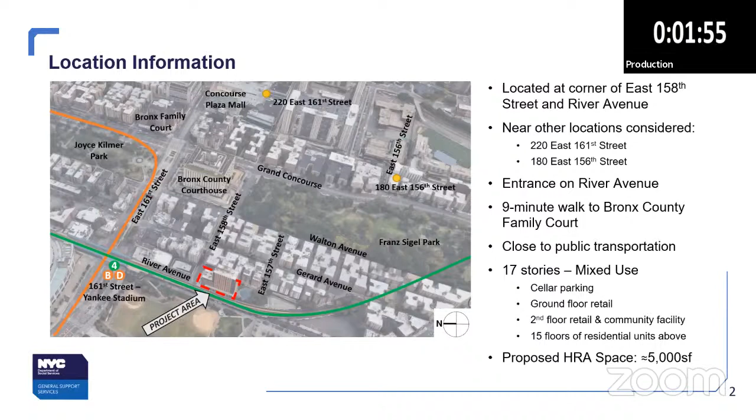The project area is located at 810 River Avenue at the corner of East 158th Street and River Avenue in the Concourse area in the Bronx, relatively close to Yankee Stadium. We considered 2 other sites in the vicinity represented by yellow dots, 220 East 161st Street and 180 East 156th Streets. However, this location was deemed the best fit for our needs as it offers optimal space configuration and is in close proximity to the Bronx Family Court. The entrance to the proposed location is on River Avenue, approximately a 9-minute walk to Bronx Family Court. This is ideal as HRA staff need to be close to attend hearings. Additionally, the proposed office is located within a 17-story mixed-use structure of which HRA proposes to occupy a portion of the 2nd floor. Next slide, please.

This location is easily accessible. It is close to 161st Street, Yankee Stadium, on subway lines B, D, and 4. Next slide, please. It's also accessible by numerous local and express buses. Next slide, please.

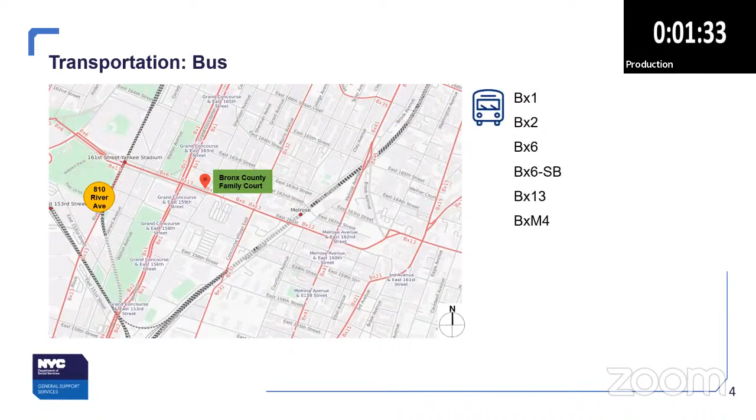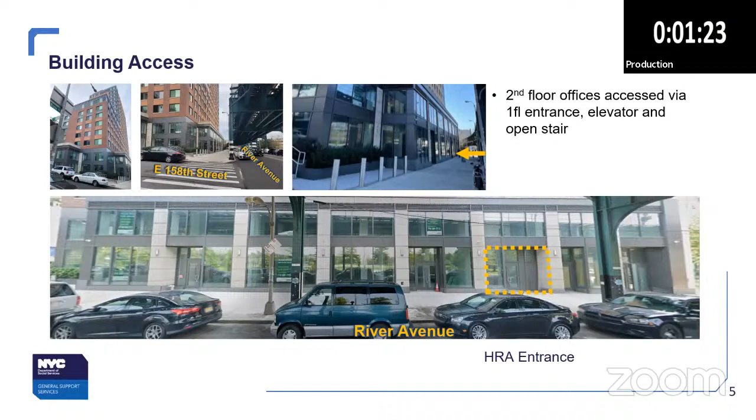The proposed second floor office is accessible from the street entrance on River Avenue, leading to a shared commercial lobby equipped with an elevator and open stair. Next slide, please.

The second floor is multi-tenanted, of which HRA proposes to occupy 5,000 square feet, accommodating a total of 20 staff to create the Bronx Borough Office. This is a joint HRA office, which will include Office of Child Support Services and Office of Legal Affairs. The HRA entrance and waiting area with the single occupancy client restrooms are depicted in purple on the bottom right-hand corner. The area in pink indicates staff and client interview areas. Lastly, the area in green represents staff-only areas consisting of print copy rooms, storage rooms, LAN room, restrooms, wellness room, and pantry.

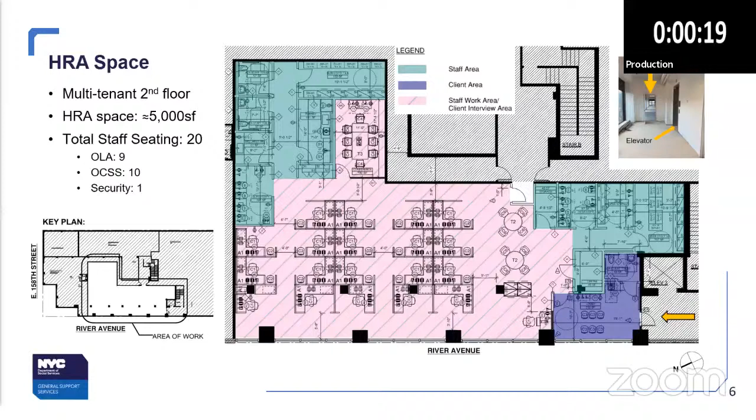In conclusion, this new office space is essential to comply with the 2018 court mandate, which will facilitate more efficient movement of high-volume cases containing documents compiled from DSS systems and paper records obtained directly from public assistance clients. Thank you so much. Next slide, please. I'm happy to answer any questions you may have.

Thank you very much. One question for me: how many client visitors do you expect to see every day in your new space here? Usually the clients are by appointment, and we anticipate 5 on a daily basis. Okay, thank you. Let me see if members of the commission have questions. Mr. Vice Chairman, Vice Chair Knuckles.

Thank you, Chair. And thank you, Ms. Sheikh. I just wanted to clarify, is this a relocation of a pre-existing office function, or is this a new office function, pursuant to the 2018 policy that you just mentioned?

In 2018, when we were mandated to have a joint function, we consolidated and comprised all of our functions at 900 Sheridan Avenue, which is where the court space is located. We were in the lower main level, basically the basement area, and we were very constricted and confined. We determined that we had very poor internet connection, and then COVID happened. A lot of our hearings had to occur virtually, and we determined we weren't able to conduct these meetings virtually because of the poor connection. Right now, our staff are working from home. We did create an intermediary office at 305 Ryder; however, that is 20 minutes away on a bus line. So although we accommodated ourselves at 900 Sheridan, it wasn't ideal, and so now we're looking for a more permanent location.

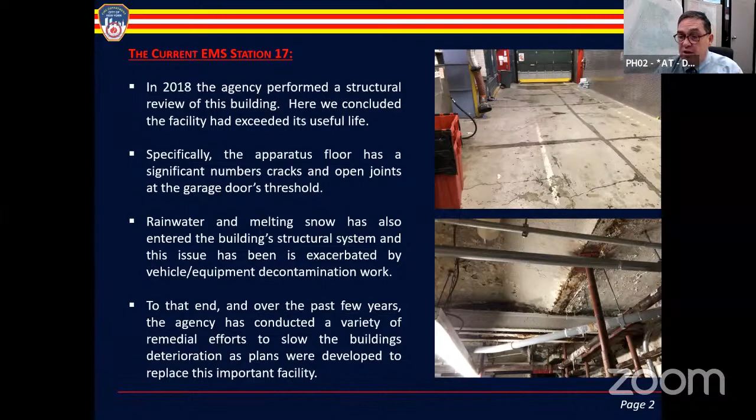With funding support from City Hall to replace this facility in 2019, the agency selected the vacant parcel at 1257 Morris Avenue for the new site. Located within Bronx Community Board 4, which is under the agency's jurisdiction, the lot measures approximately 15,000 square feet and is adjacent to the quarters of Engine 92, Ladder 44. Here, the agency, working with DDC, plans to build a 2-story, approximately 11,700 square foot facility with below-grade parking for station staff to serve as a new home for Station 17. Next slide, please.

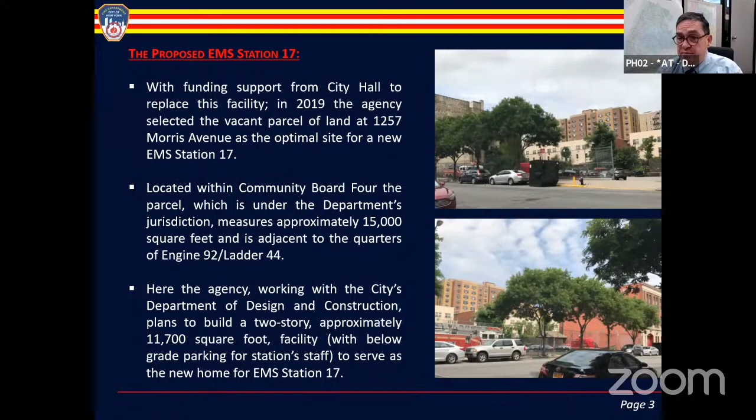The proposed facility's second floor has an office for the station's captain, male and female locker rooms, bathrooms, a stress reduction room which is a gym, training area, outdoor terrace, a lactation room for EMS members who are also nursing mothers, space for security and telecommunications equipment, several storage areas, the building's mechanical systems, elevator controls, and custodial closets.

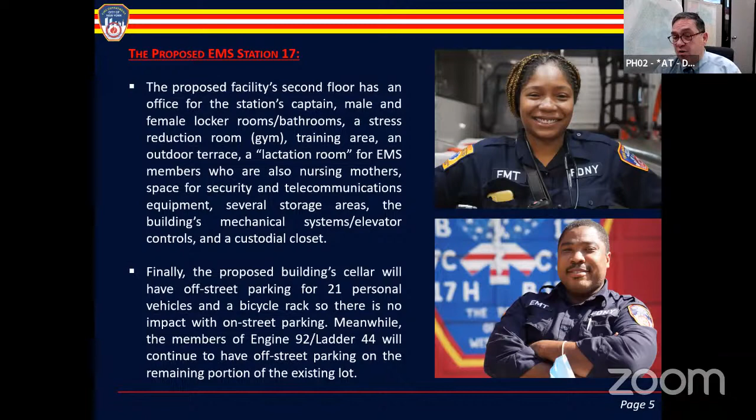Finally, the proposed building cellar will have off-street parking for 21 personal vehicles and a bicycle rack, so there is no impact on-street parking. Meanwhile, the members of 92 and 44 will still have off-street parking on the remaining portion of the lot.

EMS station is not allowed as of right in R7-1 zoning district, so a request for a special permit is being made for the proposed project.

The proposed EMS station will comply with all applicable bulk, height, and setback restrictions, as well as parking requirements in an R7-1 district. To summarize, the fire department believes this proposed new facility is important because it will enhance the agency's EMS capabilities within Bronx Community Board 4, eliminate traffic and parking issues along Ogden Avenue, provide our EMS staff with a state-of-the-art facility while moving them out of an old structurally failing building, and not impact traffic and parking along Morris Avenue after it is built.

As such, the fire department respectfully requests the Planning Commission support this action so we may improve the agency's emergency medical response capabilities in this area.

And with that, I will take anyone's question.

Thank you very much, Mr. Harney. We appreciate it. And forgive me for going long. That's okay. You didn't. You were almost perfect.

One question, forgive me if you said this, but the current location that is being used - what's the future of that site?

Well, right now, the fire department must use this facility for the next several years until the proposed project, if approved, is built. Once the proposed new facility is built, the fire department will relocate to the new site on Morris Avenue, and then surrender jurisdiction of the property to the Department of Citywide Administrative Services. Plans are, as of today, to transfer jurisdiction of this building as part of the borough-based jail system project for a community center.

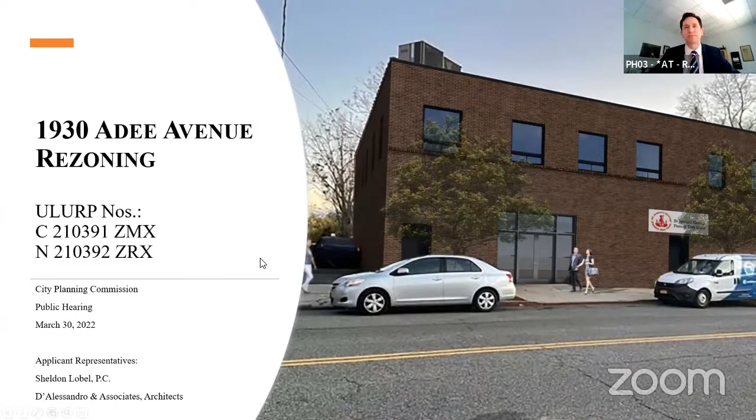Thank you, Chair. Commissioners, good morning. Richard Lobel of Sheldon Lobel PC, pleased to present the 1930 Adee Avenue rezoning. The building at the site received a certificate of occupancy back in 1963 as a metal manufacturing institution, and at the time it occupied the western portion of the site. In 1987, materials were filed with the Department of Buildings to expand that building, but between 1987 and 1995 the building was expanded without the benefit of approved permits, and in 1995 a violation was issued by DOB. So the building right now is too large for the site, built outside the parameters of the existing R4 zoning. In 2017, the applicants obtained the site with the intention to convert it to daycare.

So what would be done here is a rezoning from R4 to R6B. This would be for the existing site as well as for the 3 adjacent residential sites, which we will discuss momentarily. In addition, MIH options 1 and 2 would be mapped.

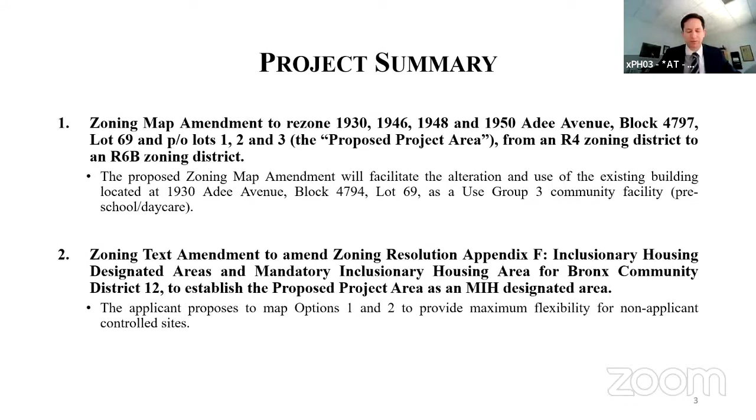So what would be resulting from this: your existing building is built to a 2 FAR. The site is roughly 7,000 square feet, and the building would be roughly 14,000 square feet. Again, an existing building, but this would allow for the renovation and legalization of it. Interestingly, the 2 FAR of this building is permitted within the existing R4, but the lot's front yards and side yards are non-compliant, as well as a small portion of the rear for lot coverage. So there's a portion of the ceiling in the rear that would be reduced by 2 feet in height, and that would cause, with the rezoning, the entirety of the building to be complying.

This is all in favor of the opportunity for St. Gemuel, a beloved local daycare institution, to be able to locate at the site. They've served members of the community for close to 20 years and recently, as of last week, received New York City DOE approval to operate at this site. So this would allow them to operate here with the modifications as proposed.

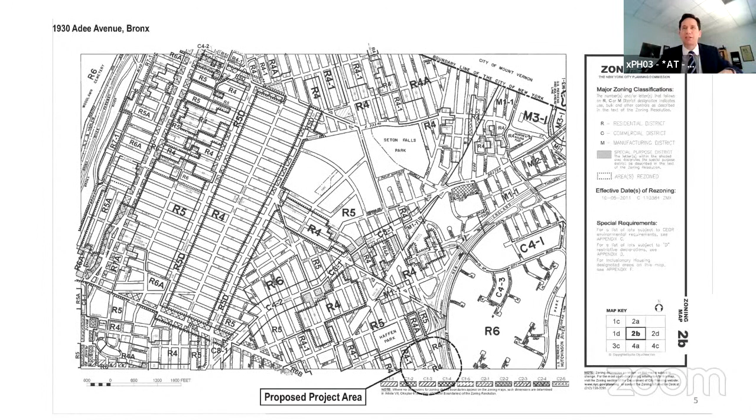So the zoning map shows a vast R6 to the east; this district itself is R4. Why is this rezoning merited here? You've got Adee Avenue, a wide street at 80 feet wide, off the New England Thruway. So even in and of itself, an R6B would be appropriate here, a slight uptick in density, respecting the fact that we are next to a major thoroughfare along an 80-foot wide street. The site itself has great street access, being a corner lot.

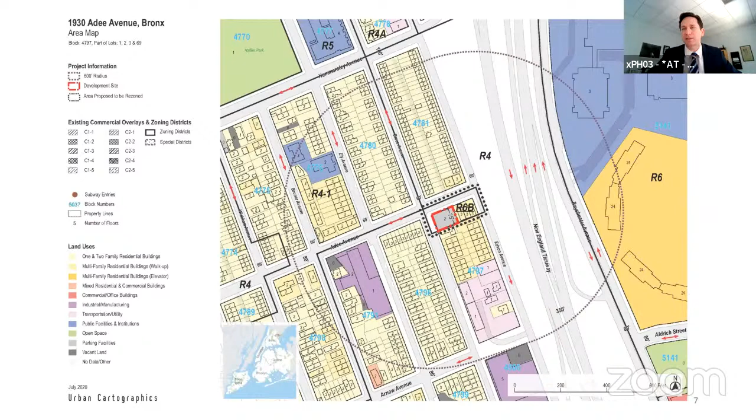In addition, the 3 residential buildings to the east of us are all non-complying, with FARs greater than 1 up to 1.63, so this would make them less non-complying. If you go to slide 12, there's a plan showing the 2-story portion which would be reduced by 2 feet in order to cause this to be legal and complying under the R6B. With that, the applicant team is happy to answer any questions.

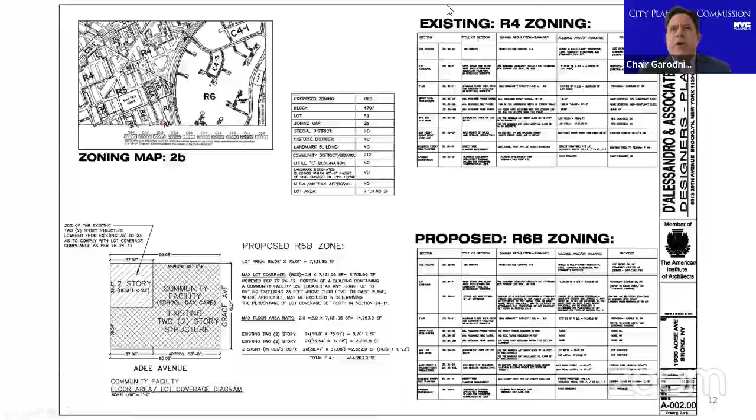The building of interest that you hope to allow St. Gemuel daycare to come in, what is currently happening in that building? I know it's overbuilt, non-compliant, all of those things, but what is actually happening in that building today? So it's currently vacant. There was a house of worship operating at the site prior to vacancy.

One of the reasons I think it's a meritorious rezoning is because the underlying 2 FAR for community facility is the same in the existing R4 and the R6B. This basically was an opportunity for us to allow for these more generous yard requirements to legalize this building with a minimal amount of work. I would add, Chair, that the conditional approval from the Department of Education provides funding for St. Gemuel for the 2022 to 2023 school year. So the community board, the Bronx Borough president, everyone was very excited about the opportunity to provide this quality daycare instruction at this site.

On the R6B, you're including this site, I know, mostly for compliance and yard requirement purposes, but you're also including 3 additional sites, which, as you described, by changing the zoning, would make them less non-compliant. Can you say a little more about that, and also about R6B in this context?

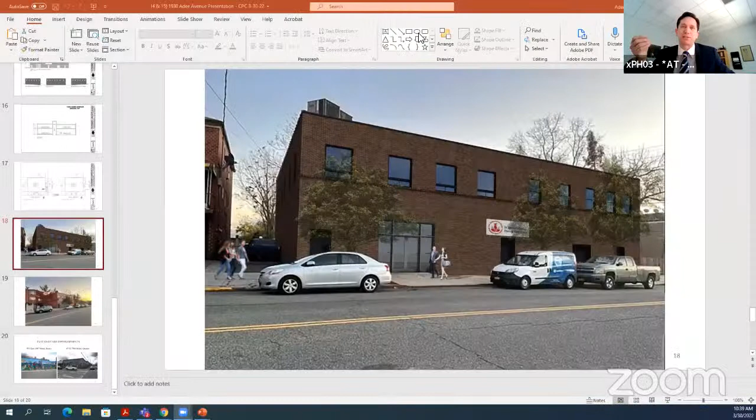Sure. So Ron and Michael, the applicants, actually have experience in producing and building daycare centers. I don't know whether we're able to recall the slides. The last slide included demonstrates two of their prior projects, which are both daycare centers. Commissioner Burney, we did want to, to the extent those can be put up. If not, I can describe them. Oh, there we go, still the last slide in the presentation.

So one in the Bronx and the other in Queens, and essentially the buildings are painted with murals to make them more inviting to the pre-K through nursery school children who attend the site. So they are conscious of the appearance of the building and would make this as inviting as possible. So thank you for the comment.

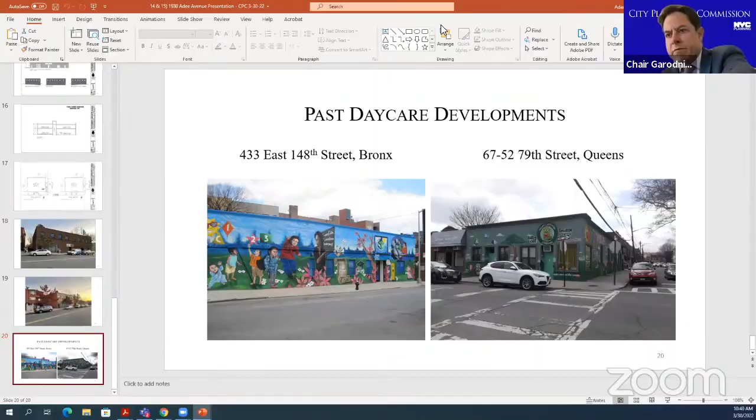Thank you, Commissioner Burney. Giving the rest of the commission a moment to pose any questions they may have here.

Okay, seeing none, and I will note we also do not have members of the public wishing to testify on this item. So thank you for being here with us, and I will close the hearing on this item and move to the next one. Madam Secretary, if you don't mind, please call the next item.

Borough of Brooklyn, calendar number 16, Roundtable Senior Center, CD4, C220212PQK. Public hearing in the matter of an application for acquisition concerning Roundtable Senior Center.

Great, thank you very much. We have joining us today Leah Krieger from DCAS, John Koza, who is also with DCAS, and I'm going to let Ms. Krieger define his specific role. And also we have Sandra Christian. So I'm going to turn to Leah Krieger from DCAS for 3 minutes.

Welcome. Thank you, Chair and Vice Chair, and thank you, Commissioners. I'm an architect with DCAS, and John Kosa is the lease negotiator with DCAS, and Sandy Christian is with the sponsor organization Riseboro. Roundtable Senior Center is located in the Bushwick Avenue section of Bushwick. Please go to the next slide.

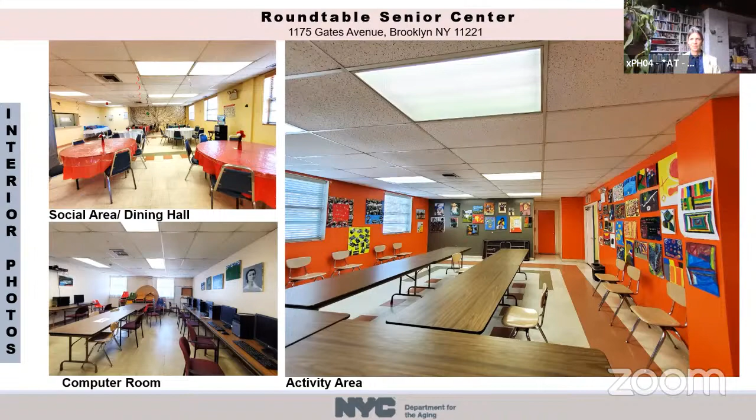Next slide, please. Hi.

Did we lose the slides? We can pause to get those up. We'll give you a little extra time here.

Don't worry, appreciate that. So one of the concerns of the commission has been the street beautification, and so the intention is to provide planters. The entrance to the senior center is on the left, the entrance to the child care center is on the right. So the intention is to take down the roll gate, to paint the doors so that the two front doors match, to provide planters, and to repair the sidewalk and remove graffiti.

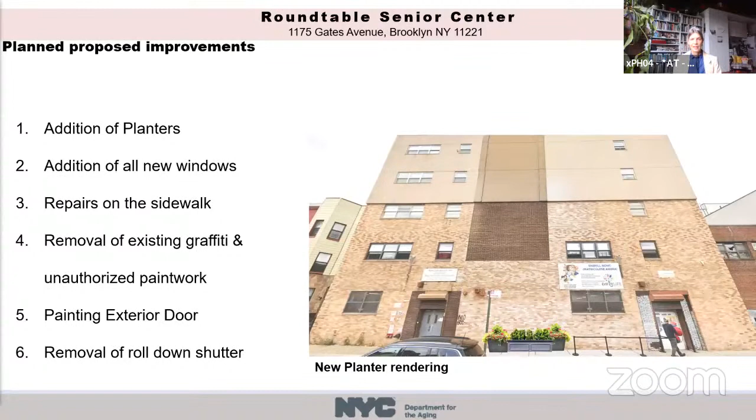Next slide, please. And that's our presentation today. We are open for questions.

Great, thank you. Just going back, the Roundtable Senior Center has been on this site for how long? The center has been open for over 40 years. Riseboro took over 16 years ago as the sponsor. Okay, and the current lease expires when? The current lease expired in January of this year, but we're occupying it under the TNH clause until we sign a new lease. Okay, got it.

Thank you. Let me go to Vice Chair Knuckles. Thank you. Mr. Costa, you are with DCAS, are you not? That's correct, yes. Have you visited this location recently? No, I did visit it. It probably was 2 years ago, approximately, by now.

Well, has anyone from DCAS visited the property recently? What I'd like to get is a personal expression of the current physical condition of the location. Can anybody speak to that?

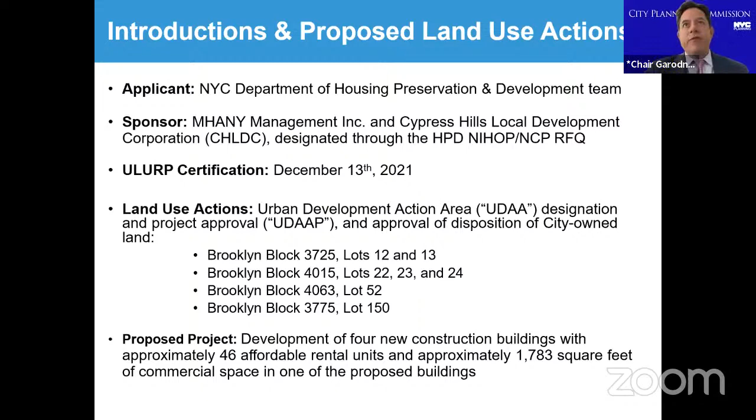The project is being developed as a joint venture between the Mutual Housing Association of New York, or MHANY, and the Cypress Hills Local Development Corporation, CHLDC, under HPD's Neighborhood Construction Program, or NCP. The ULURP application was certified on December 13th, 2021, and is seeking approvals for Urban Development Action Area designation and project approval, and for the disposition of city-owned land. Now I'll hand it over to the development team.

Hi, my name is Meredith McNair. I'm the community planner at Cypress Hills LDC, and we are very proud to be partnering with MHANY Management on this project. CHLDC itself is a 38-year-old nonprofit that has been serving Cypress Hills and East New York for these past decades, both as a community development organization and a settlement house with a wide range of services serving all ages in the neighborhood. MHANY is similarly rooted in this neighborhood for almost 4 decades, and has a long track record of affordable development, and also is a home buyer and foreclosure prevention counselor.

This map shows the 4 development sites: 492 Glenmore, 2358 Pitkin, 943 Dumont, and 743 Blake. You can see they're all within a few blocks from each other and pretty close to the Van Siclen Avenue C station. These are actually split between the 2 council districts, 37 and 42, with 2 sites in each district.

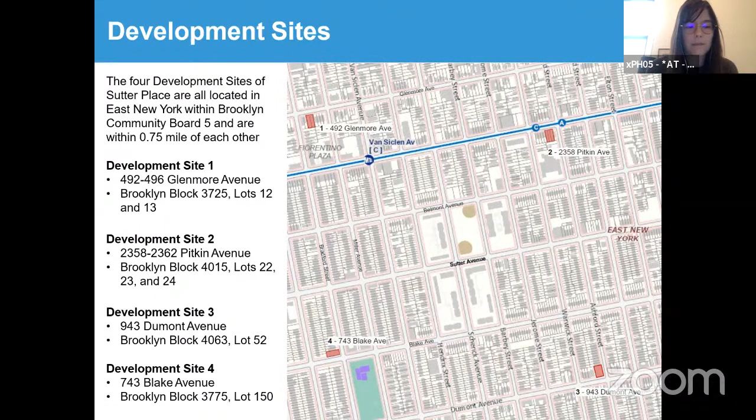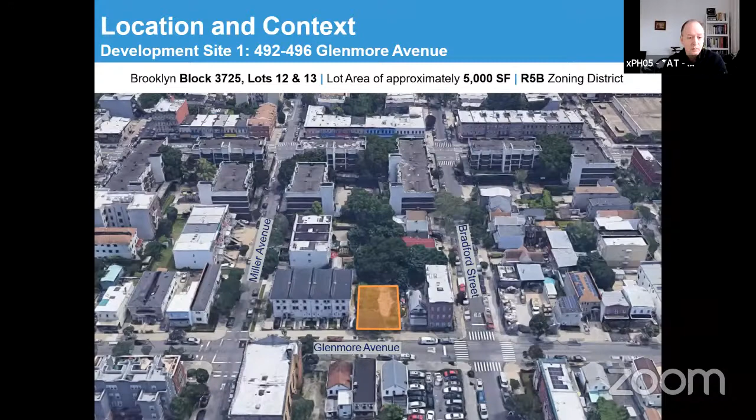Hello, my name is Chin Dow Glasgow, representing RKTB Architects and Project Architecture. I'll be doing the buildings. This is site 1, which is 492, 496 Glenmore, a 5,000 square foot lot, mid-block with a low density zoning of R5B.

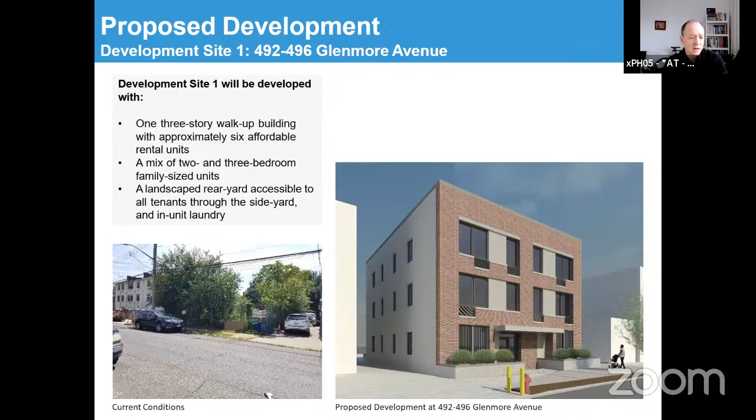To be concise here, all sites have back lots or backyards that are accessible by all the tenants of the building with landscaped areas, hard areas, and raised planters. This building has 6 units, 2 and 3 bedrooms, and it's a walk-up building.

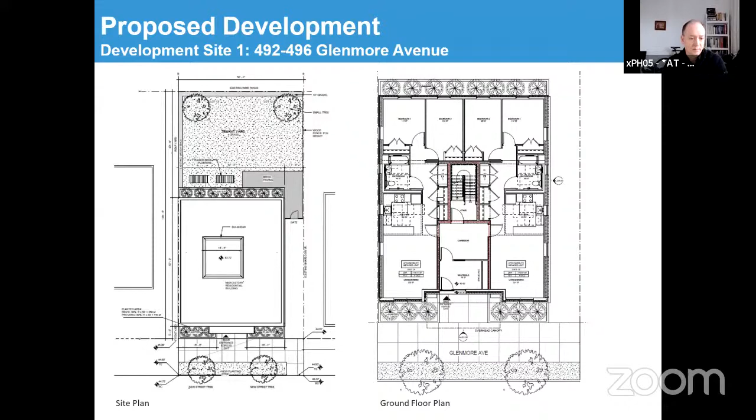Here you can see the site plan showing the rear area with planters, paving, trees, and raised beds. You can see the typical layout of the units. The front is set back, affording some privacy and planters, and then you have large living rooms, kitchens, and bedrooms, and all of the units, except for the large building, have in-unit laundry.

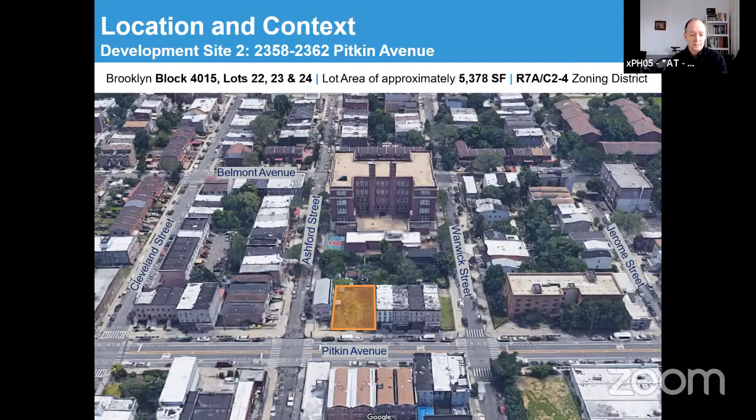This is along the busy Pitkin corridor. It has ground floor retail space, which will likely be divided into 2 retail spaces. It has the residential entry on the left. It is an 8-story building with all 1 and 2 bedroom apartments. This one has a shared laundry on the roof with an outdoor deck on the setback of the building that is open to the tenants, serving as an amenity to the laundry room. It's an elevator building with 26 units.

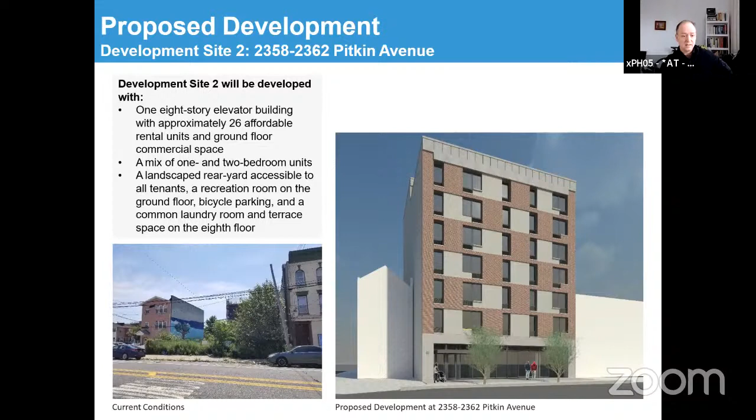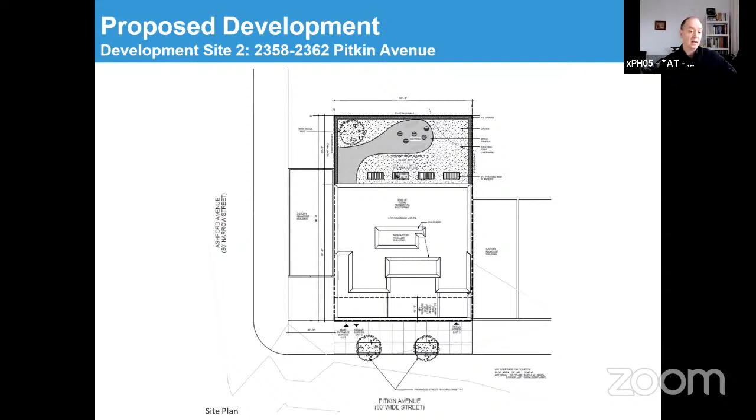Here you can see the site plan with the shared space in the rear, the front, and the setbacks happening at the upper floor. The ground floor also has a common recreation room, which acts as both access to the rear yard and common space.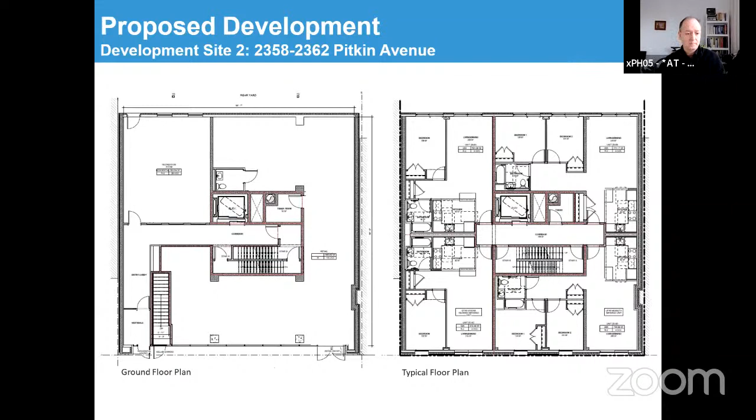This is the next site, a 5,400 square foot lot in a very low density R5 zoning district. This is the one we're asking for an override, and I'll address that quickly. We're essentially asking—there are 2 setbacks required on a lot like this, as we are not providing parking, since it is an income restricted housing unit building. The setbacks are generally defined somewhat for parking.

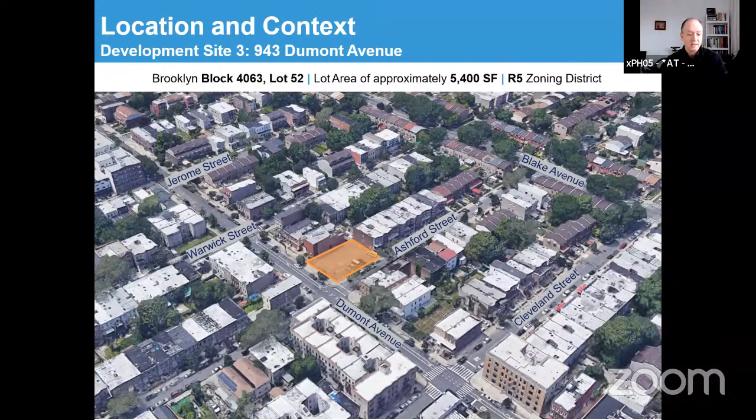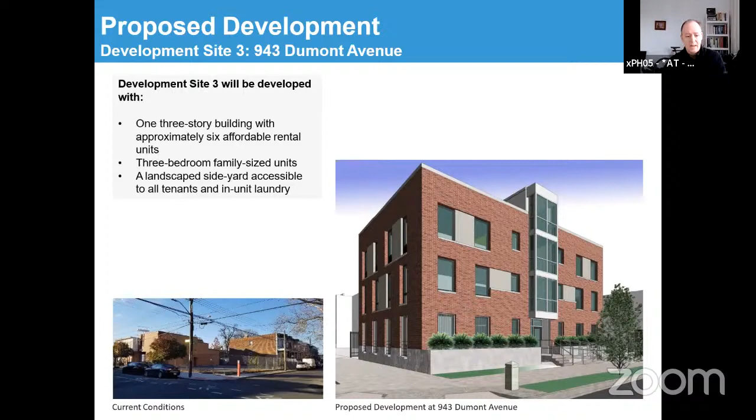So here you can see the building. There is one setback along the more residential street, but we are not setting back on the more commercial street. And you can see in the slide to the left of the street view that most of the buildings here do actually push up to their property line, and this would not be inappropriate for the existing context of the building. The building itself has 3 stories. We maximized 3-bedroom units, 6 total with a center walk-up stair, and we maximized what we could fit on the site with unit sizes.

Next slide, please. Here you can see the site plan. So on the site plan, you can see to the left here, the facade is set back. We raised up the building 2 feet with a ramp and stairs so that we can get some privacy to the ground floor unit that's at the corner.

And then, one of the reasons we need this setback, or rather we need the building not set back, is because the lot is 90 feet deep. We do need a 30-foot legal light and air at this side yard in order to provide legal light and air for the bedrooms of this unit, which you can see at the top of the typical floor plan, where the living room is in the corner and the bedrooms are on the side. And then in the middle here, you can see the walk-up stair with open glass to the street to act as a semi-private but safe space.

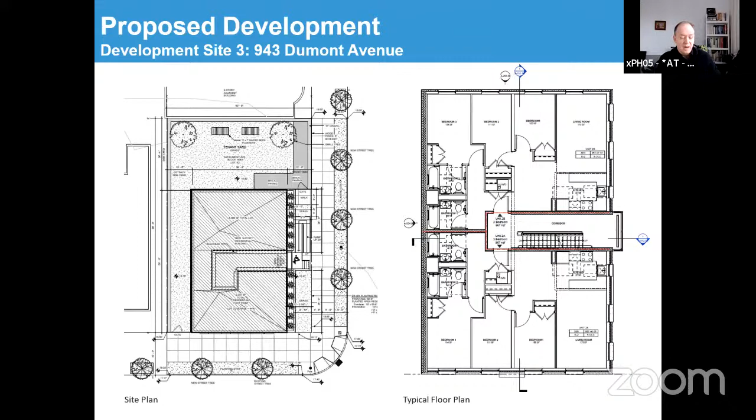Next slide, please. Here you can see the last site, which is 4,000 square feet. It has a slightly higher zoning at R6. Another corner lot. Next slide, please.

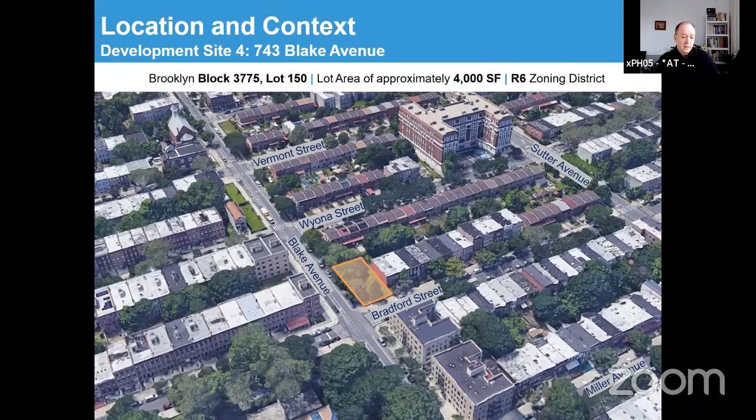And here you can see the building itself. It has a setback along the right-hand side there, and it has a similar open stair in the center with a circulation. There are four 3-bedroom units on each side, going to a total of 8, and again with a landscape yard.

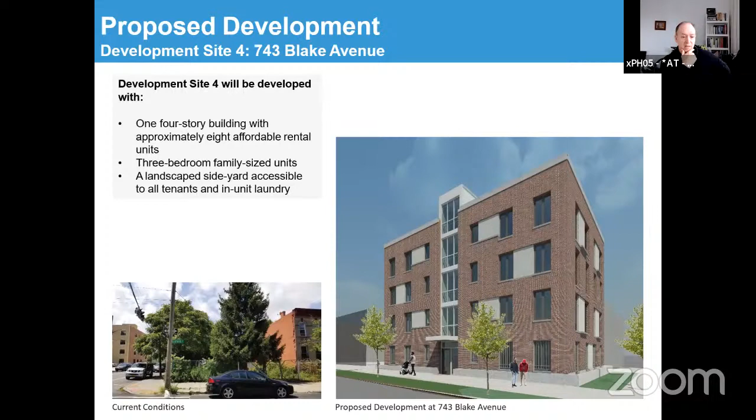Next slide, please. Here you can see the site plan. We don't have any problems with setbacks on this site because it is a 100-foot typical New York City lot. So we're able to obtain the 10-foot setback on the bottom, which aligns it with the existing building on the right, and still get a 30-foot legal light and air yard for the units.

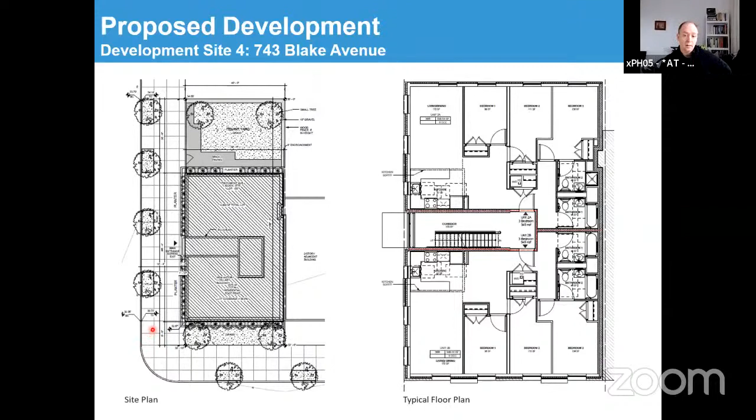And with that, I turn it over to the team.

Good morning. I have 10 seconds to tell you that the project is a 100% affordable 46-unit development, and what you see here is actually a realignment of the unit incomes in response to the council people, both Councilwoman Nurse and Councilman Barron, the community board, and the borough president. So we actually worked with HPD to bring the affordability down. You'll see here that of the 46 units, we still have some, as there are people in East New York, at the 60 to 80% AMI. But we actually pushed down, and over 70% of the apartments are available at AMI levels affordable to residents currently in East New York.

Next slide, the rents reflect 30% of income by those percentages. The next slide summarizes our ask. Next slide, please. And I don't know, Nick, if you want to quickly give a couple of words.

Sure. Okay, well, we can answer questions about the schedule if anyone has it. Thank you so much. Yes, thank you very much. Time is up, but we'll see if there are questions on the schedule. Good to see you.

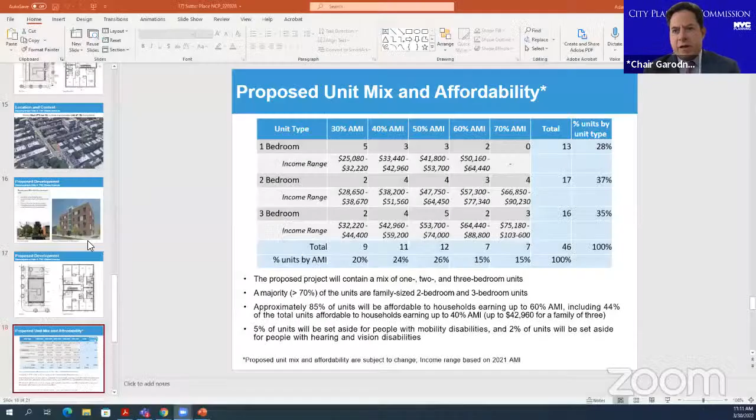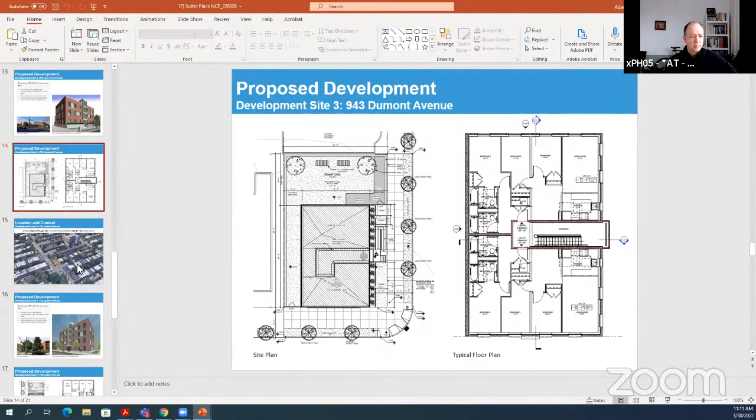Like if you could go back to the aerial view or the site plan, I could show you that. Let's see if we can pull that up. We'll ask our team to bring the presentation back up. It would be page 14. Page 14? Okay, correct, yes. Great, thank you. Okay, here we are. If you look at - actually go one more please, before that. One more past that, the aerial view is the one where you can see.

Okay, here you can see along Dumont, as Ismenia was explaining, the buildings are not set back there on Dumont Avenue, right? So that's really more conforming with what's happening with the rest of the buildings, because Dumont is more of the avenue, and Ashford is more of the residential street. You have retail along Dumont and that kind of thing, so it really is not out of character with the context.

Right. Okay, so I think the whole point here is that we wanted - I don't like it, again, you guys are all the planners - but we wanted to maintain the street face. So on Ashford it will be aligned with the other buildings currently on Ashford, and on Dumont it will be aligned with the current buildings on Dumont. Okay, I got it. By doing it this way, you keep a consistent street front on both Ashford and Dumont, and you comply with legal light and air requirements at the same time. I got it. Okay, all right, thank you. That's helpful, thank you.

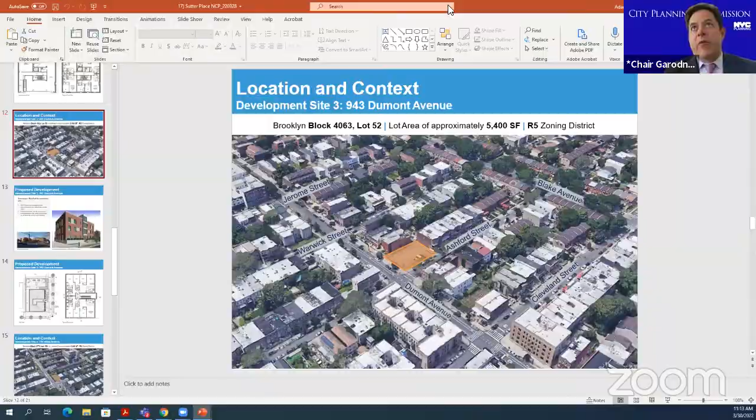Let me see what other questions there are here, if any. And while I ask this of the commission, I'll just confirm with the applicant team that Ryan Moros is part of the applicant team. We have him signed up here just in a slightly different way. Okay, all right, yes, great. He's from HPD. Okay, that's what I figured, but I just wanted to confirm.

Yes, thank you all. It's great to see you chipping away at these smaller sites, which I realize are a particular challenge to develop, and I especially appreciate the daylit stairways on sites 3 and 4. That's always a nice thing to see. I wonder if you could tell us a little about how these are going to be managed. I know you've got lots of other properties in the neighborhood, but when you have units scattered all over the place, management is sometimes a challenge. Can you tell us a little about your management approach?

Sure, thank you Commissioner Levin. It's Ismini. MHANY Management will be co-owner with Cypress Hills, and we self-manage. I think we cut the slides showing where our buildings are - we own over 700 units of housing in and around these sites. That's actually why we applied for this project in the first place, because we could just add them to our portfolio. MHANY's portfolio happens to be a scattered site - we have about 200 small buildings, all less than 10 units, many of which are in East New York and in CB5. So what we have is a system, and none of the units will actually have a resident superintendent.

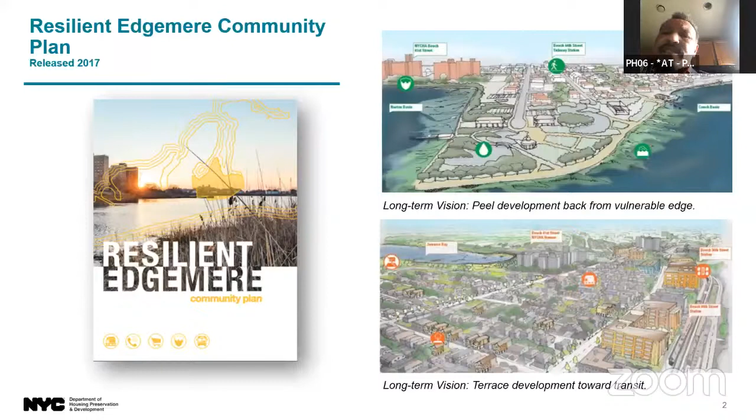So as part of the long-term vision here, peeling back from the vulnerable edge, particularly at the bay side, and then terracing development towards transit at the other end of the neighborhood. Can you go to the next slide?

The Resilient Edgemere Initiative culminated into a plan in 2017 that identifies a land use framework and sets strategies to create resilient and affordable housing for a range of household incomes and sizes, increase retail and community facility offerings, mitigate future flood risks, increase waterfront open space, and improve the coastal ecology. The plan positions Edgemere into the larger vision of the city to improve the ability of flood-prone neighborhoods to withstand and recover quickly from future storms.

These are the goals and strategies from the plan: protect the neighborhood from flooding, create resilient housing and maintain low density feel, improve streets and transportation, and increase neighborhood amenities. Next slide, please.

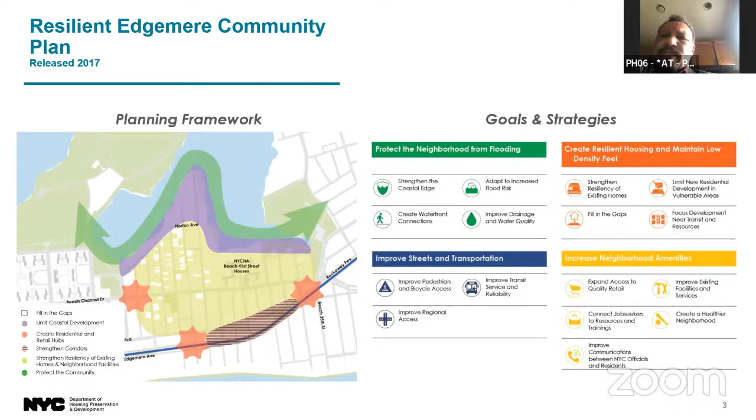In the wake of the devastating effects of Superstorm Sandy, the city has invested into this community and the peninsula as a whole to make it more protected from flood events, as well as more accessible to natural amenities for the folks that live there and visit there.

These investments have and will include park improvements at Bayswater Park and Rockaway Community Park, as well as continued sewer and road condition improvements between Beach 49th Street and Beach 59th Street, HPD rehabilitation, reconstruction, and elevation of approximately 109 storm damaged homes from Superstorm Sandy, and the work of the U.S. Army Corps of Engineers with the support of the Mayor's Office of Climate and Environmental Justice and the Parks Department to protect the peninsula from long-term erosion and reduce coastal storm risk.

Also on this map here, you see in addition 2 sites that we've reserved. One at Beach 39th Street, which is reserved for a future public school, and then one on Beach 49th Street, which is reserved for drainage purposes. So those 2 sites are in blue here on this map.

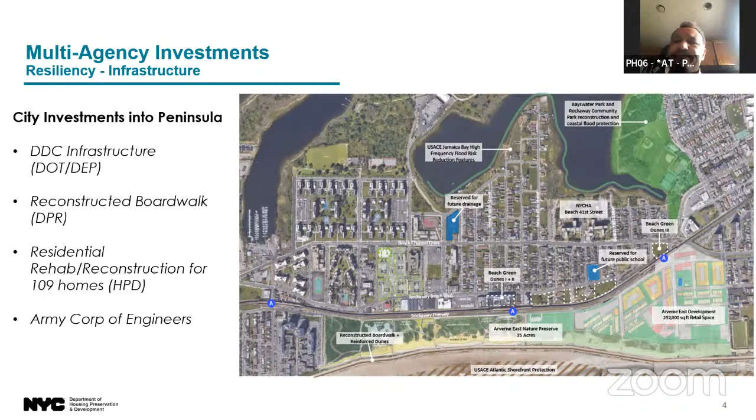Edgemere's geography has been a key factor when planning an appropriate strategy for achieving the goals of the community plan. Low-lying Edgemere falls within a high-risk area, and the community exists within the coastal A flood zone. The land use strategy proposed as part of this application seeks to work within this geography while responding to the feedback that has been generated through the community plan.

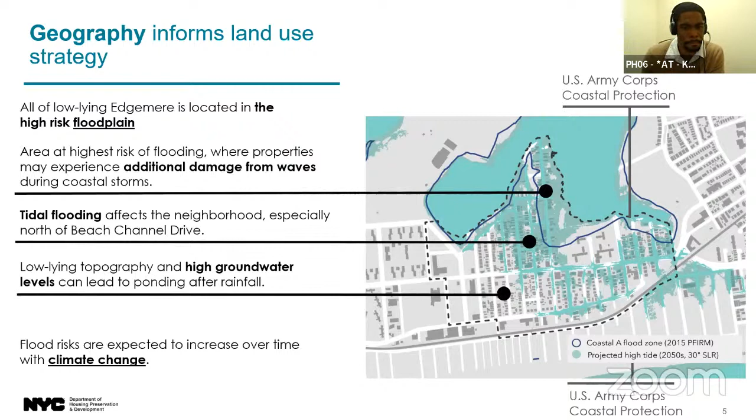The proposed land use strategy seeks to push future development and density away from Jamaica Bay to more appropriate locations that are less vulnerable, and these are generally located near public transit. Through this conservative approach, we have identified planning areas and proposed specific actions within each of these areas.

Within our most vulnerable areas in Edgemere, we have proposed a set of downzonings that will limit future development. Coupled with these downzonings, we have proposed a new special coastal risk district, which will further limit development in these areas. Additionally, we have identified Rockaway Beach Boulevard as an appropriate location to capture some of this displaced density potential through a modest upzoning that will also be mapped with MIH.

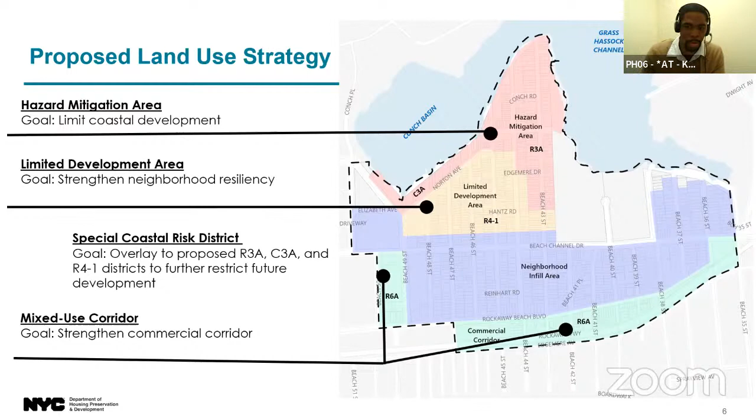And on the screen right now is just a further breakdown of the actions that we're requesting. These actions are needed to facilitate the goals we've discussed from the plan. More specifically, the downzoning actions will rezone portions of the area's existing R4-1 and R4 areas into R3A. Portions of the existing R4 will be rezoned to R4-1, and portions of the existing R4, C8-1 and R5/C1-2 will be rezoned to R6A.

As mentioned, the proposed special coastal risk district will overlay the new R3A and R4-1 zones. In addition to these zoning changes, we are also seeking UDAAP designation for a select number of city-owned sites, as well as amending the urban renewal plan and proposing disposition authority for all city-owned properties within the area. Next slide, please.

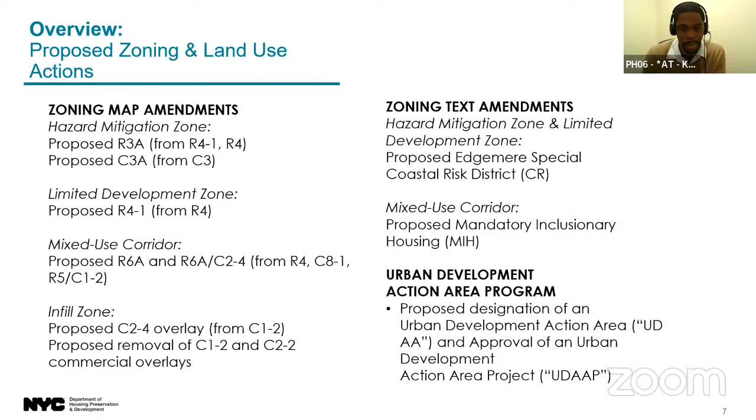Within specifically the urban renewal plan, we are seeking to amend the plan in the following ways: expanding and removing some sites from the plan, updating the land use designation so that they can align with zoning, changing some development controls to meet flood resiliency standards, increasing the unit cap, and extending the plan duration. As part of amending the plan, all of the urban renewal sites will have their acquisition authority refreshed, and all city-owned parcels and acquisition parcels will receive disposition authority.

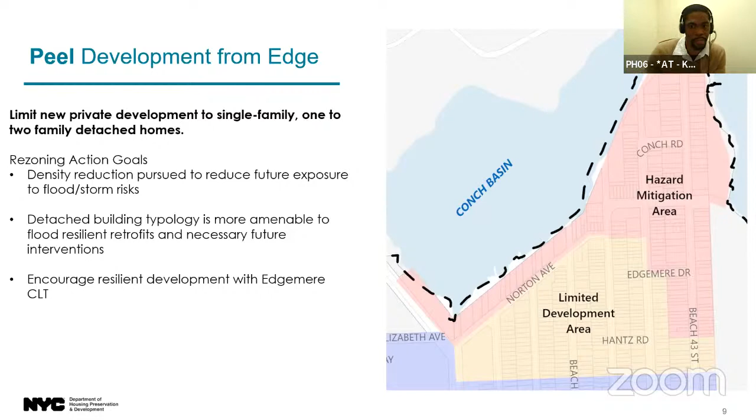As we shift development away from the most vulnerable areas, the hazard and limited development areas, the proposed actions seek to focus this potential near transit. Rockaway Beach Boulevard is better suited for an increase in development that will provide much needed community services and quality retail, as well as provide a continuum of housing opportunities for both current and new residents to the area. The increased density can achieve a number of overlapping goals, such as providing support needed to spur feasible commercial and community facility uses, increased availability of resilient building stock, and a continued source for affordable residential opportunities.

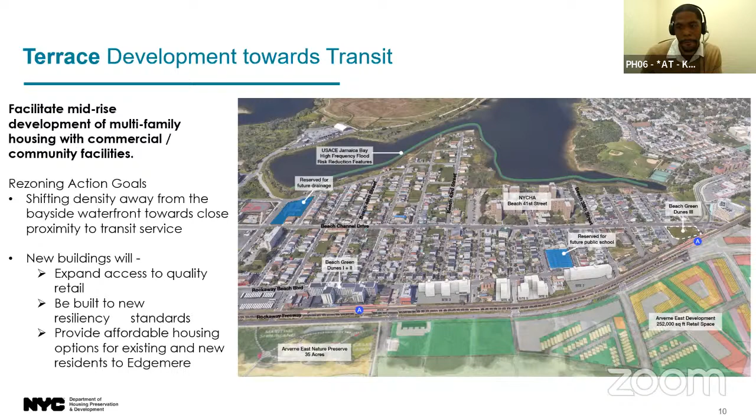I'll briefly turn it over to my colleague, Stephen, to talk us through Edgemere CLT. Thanks, Kevin. So as Kevin mentioned, much of the city-owned land in the area will be, the plan is to transfer it to a community land trust.

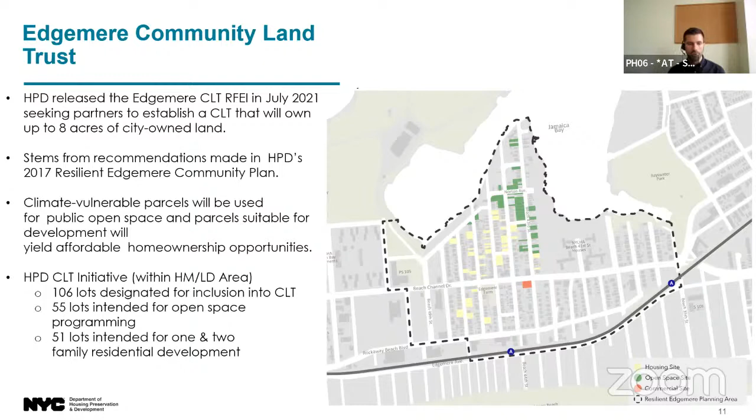HPD released what we've called the Edgemere CLT RFEI in July. That is a request to seek partners who will establish the CLT in the neighborhood, which would ultimately own up to 8 acres of city-owned land. This again stems from recommendations that were made in the 2017 Resilient Edgemere Community Plan. In accordance with the rezoning, the parcels that are more climate vulnerable will be used by the CLT for publicly accessible open space programming, and parcels that are in an area more suitable for development would be used for affordable homeownership opportunities. There's a breakdown of the lots that you can see below.

So thank you for that. Thank you for the ability to present, and we can take any questions from the commission.

Thank you very much. Let's go back to that last slide on the community land trust for a moment. I just want to make sure that I understand. We'll pull that slide back up.

So you are right now seeking partners for this. This does not exist yet, and the operator or manager of this CLT is not yet known. Is that correct? Yeah, that's correct.

As you may know, there are a number of groups organizing as CLTs across the city. They are new groups working to build their capacity right now. There is no group that is active in this neighborhood. So the RFEI put out a request for groups to propose how they would set up a CLT in the area that we could ultimately transfer this land to. In simple terms, it's a two-part process, and we're in part one right now where we have to establish the CLT. Then in part two, we would work to transfer the land to the CLT and work on the actual affordable housing development process.

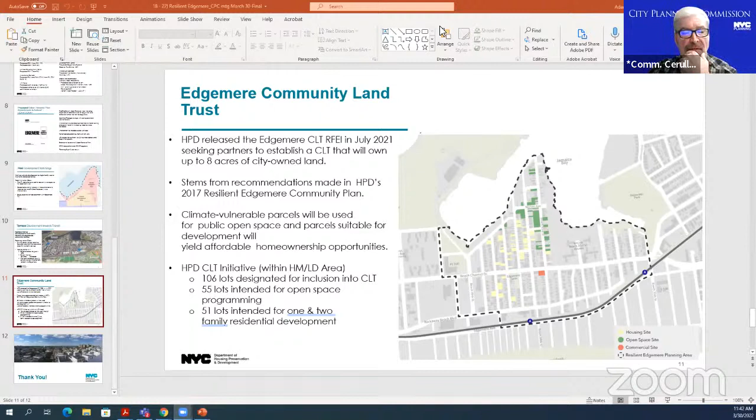Thank you, Commissioner Cerullo. Thank you, Mr. Chairman. So just kind of playing off this discussion, I wonder, and I have some, the commission has experience in this.

But back in the day, in its earliest days of the development of the Blue Belt concept, I just wonder if even before the CLT and the idea of putting it out there for all kinds of ideas, have there been any discussions within the interagency about how, if at all, a Blue Belt system could help benefit the community in the development of what ideas might be out there that could be brought into play? I ask that recognizing, of course, that the Blue Belt is never going to deal or be able to accommodate a devastating flood situation, but most of these communities that have this, that are vulnerable, also deal with the day-to-day issues regarding flooding.

It's not just in the big horrible scenario, but it plagues them even in a typical rainstorm, or it plagues them in a sort of overly large rainstorm.

And there's been no mention of the Blue Belt, but you do mention the disposition aspect of this application. And I didn't know if that would ultimately lead to the disposition of property that might be turned over to DEP and parks for this purpose. So I'm just trying to understand if that is in play. Are you just waiting for the CLT to make that recommendation, or has it been discussed and not viewed as being a good enough solution, even on a menu of items?

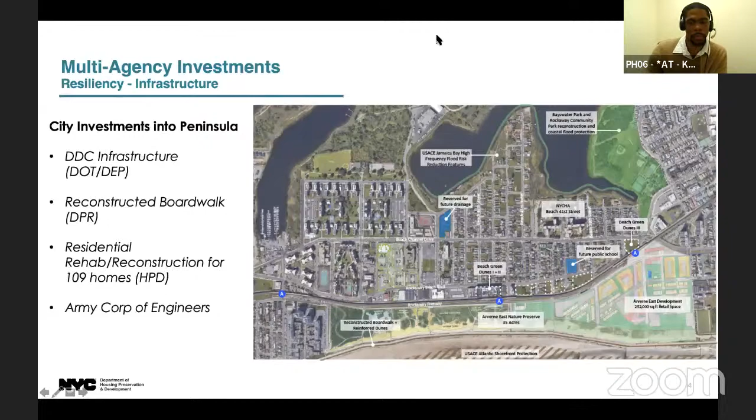One other question I had regards the Rockaway Freeway, where they're looking to upzone the R6A. Has there been any talks with the MTA to increase service out there? Yes. So what I failed to mention in my presentation, both the Department of Parks and DOT have submitted testimony they'd like to provide to the commission. I'll be sending it over after this, and it details what the current work has been in the area and the plans moving forward by those two agencies. As with SCA, conditions in this area are always being monitored by those agencies as well, and I'll provide that document following this hearing. Yeah, please. Thank you very much.